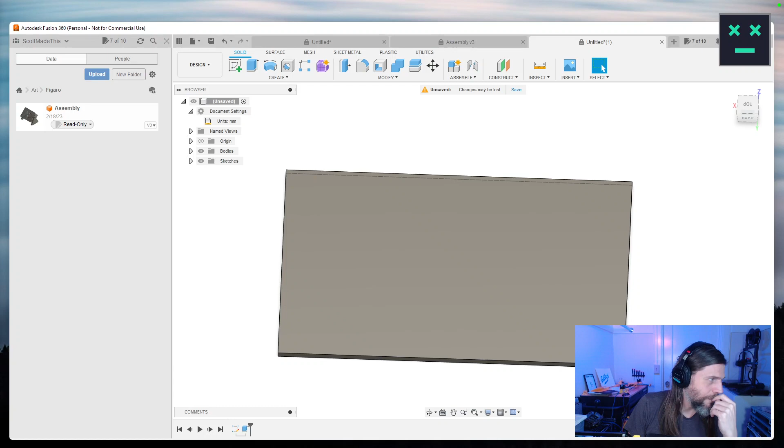Yeah, even Terrier says he used ChatGPT. I'm gonna be out of, like, the world is not gonna need me anymore because of ChatGPT, which is fine because I don't really like doing programming jobs.

Okay, so here's my thought of it. Given the sort of little layout we have, let's just take a look at what we have on the old desk here. We have this, we have the little speaker hat. It works okay, I'm done thinking about it, honestly, and we're just gonna do it. I kind of like the arrangement of this, sort of like we have it kind of arranged like this, and all of the electronics in a little stack, and then the little stack.

I haven't fully thought this through, I have to admit. The little stack kind of ends up on the thing - you know the thing - screws to the faceplate, and then that mounts to something else. So I'm interested in that approach. There's a couple things that make that approach annoying: these speakers are definitely designed to be screwed in. I had thought yesterday that I could make little slots for them - there's just a little bit, maybe like 2 millimeters or something of a little lip on the edge.

So I was thinking of maybe making it where those slide in and then butt up against the posts that the Raspberry Pi would hook to. That's my current thinking at least. I thought I'd rough that out.

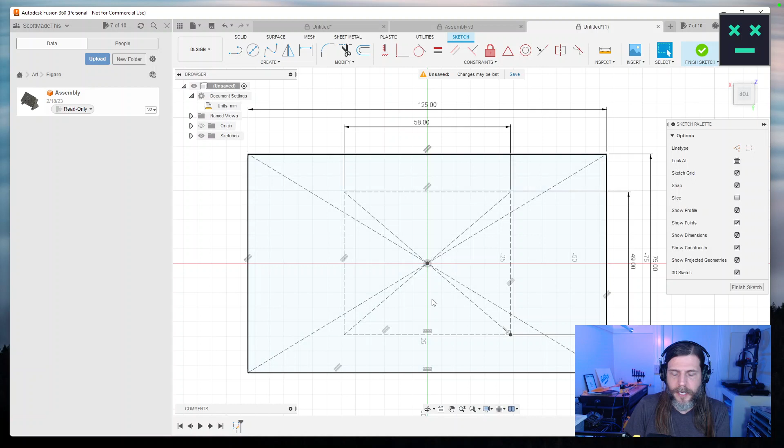So what I was thinking is we'd kind of lay out whatever the post size is here. We had a bunch of posts on the other thing, but knowing it's a 3mm screw and we probably want 2mm on each side at least, let's just call this 8mm for now. And then why did I put it on that one?

Let's put it - okay, let's do a better job first of all.

Terry, do you think I should become a full-time Sudoku streamer? Give up on everything else?

Let's do 8mm here, and then we can use a rectangular pattern. Yes, the thing is I'm not very good.

Do you think that's a problem? Do you think it's a problem that I'm not actually very good at Sudoku, or do you think that's not even relevant? Nobody cares about that. Or is it better that I'm not good? Because then people will want to help me on stream, they'll feel compelled. It's almost like a baby bird kind of thing where it's like, oh, this is clearly a helpless person.

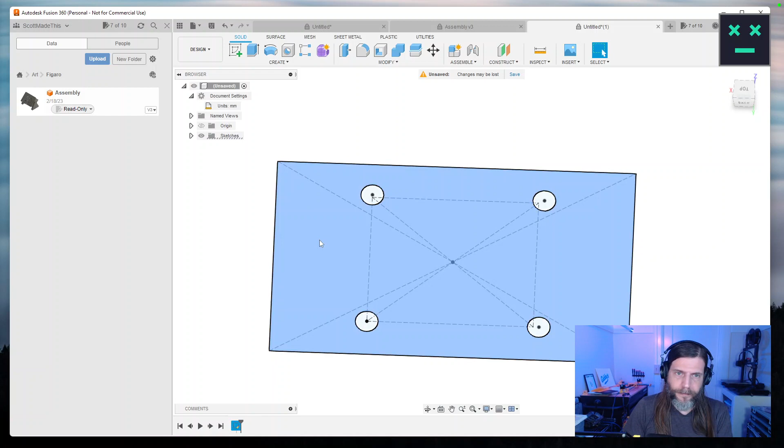So what I was thinking is we'd extrude this by a couple millimeters, say 3 - 2.5 even, perhaps. I've got to start thinking of those extrusions probably in terms of their implications for 3D printing.

I mean, obviously if it's really thick, it's slow, but it probably should be some multiple of my layer height or something. So here's my imagination, is this. These are going to have to be really tall though, because of the height of the speakers.

I mean, that is true. You never can trust chat. Terrier Darts, I don't even know if I can trust you after the hijinks you pulled on the racetrack yesterday.

Is it all just banter? Is that what I'm not understanding, the Britishness? Yeah, but I can't tell if you're just making a mistake or if you're deliberately misleading me.

So I think this is what this would look like, and then you could put holes on top of these.

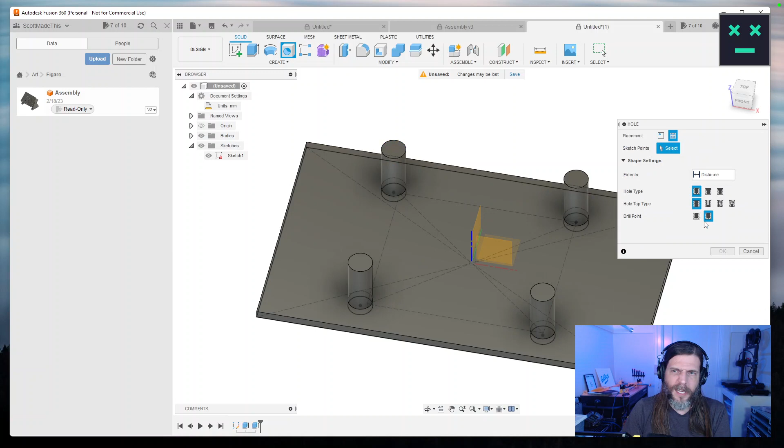Well, maybe this isn't really the way to do this. Because I don't know - a way you could do this is pick these holes, but do it relative to... I don't know actually if you can do this the way I want to do it, now that I think about it.

Like, you could - oh, good heavens. We could say that this is just simple. I forgot how you pick the tapped hole for ISO metric for a 3 mil.

The issue is I don't want to go all the way through there, and how do I do that?

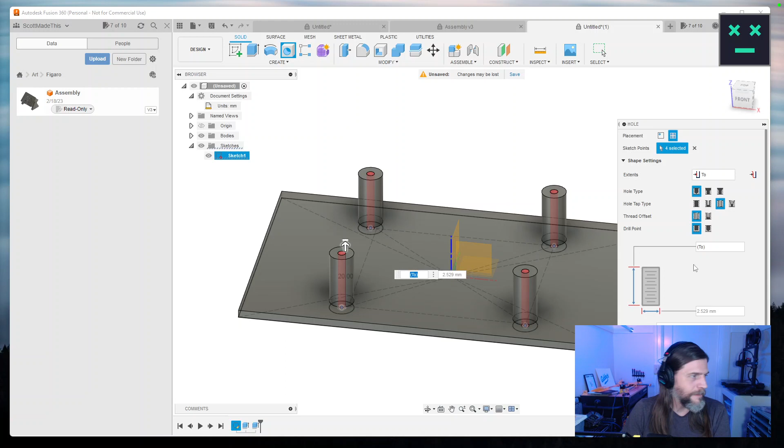That is funny when that happens, when you do a task failed successfully. Did Jirash just get mad and leave because I didn't do his work? Oh no, Jirash, buddy.

What's the right way to do this? You could rethink this situation and only go through those. So either you extrude it and put the hole from the top where you want it, or you do a sketch on the face, but it seems actually sort of weird that you couldn't do it directly.

Oh, is that what I want? But I actually want - I could offset this way, but I don't want to offset this way. I want to offset the other way. I don't know what this is. Oh, that's the thread offset - that's not what I want, that's not at all what I want. I do want a - I really want to invert this. Oh, is that? No.

Like, I wish I could do a 2 and then do an invert here. That feels like a thing you should be able to do. I mean, the very silly option would be this: do this extrude after. Which extrude is which?

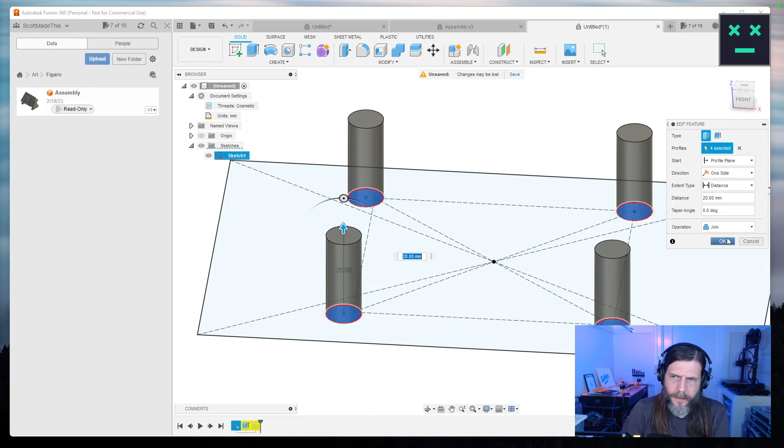I don't think this is the professional way to do this. I'm not a professional person. But you could do this. I'm gonna do this right now and then I'm gonna regret it later. Let's go 2.54 millimeters. Why not? Nah, 2.5. So that would plug those, make those holes extremely deep for no real reason.

So, you know, I was kind of imagining this, and then I was imagining maybe another sketch that described the speaker positions, where they would butt up against here but have like some kind of slot on the other side. I don't know if that's a good idea. I know it's going to be a little annoying for 3D printing for sure. We have to print it with supports and it'll be hard to get the gunk out, or you know how it goes.

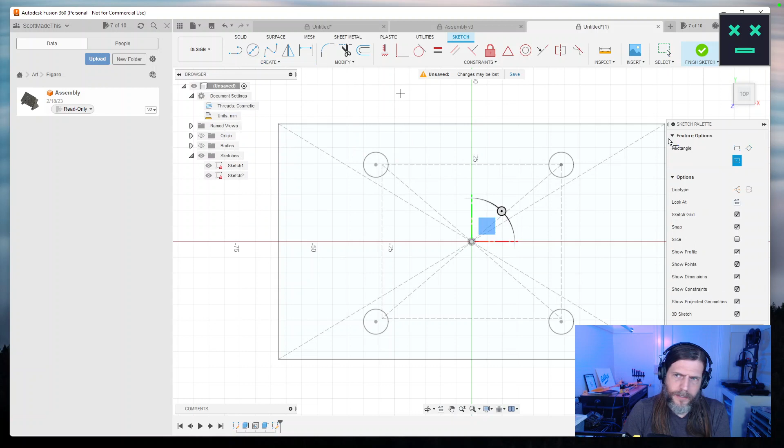But I think, trying to even think of exactly how I would go about this, the silly way would be just kind of to bool it. Because I essentially want to make just, okay, let's create a sketch here. And let's say that on this sketch, we at least want a center rectangle kind of reference for where the speakers go.

So the speakers are going to have, let's call it, 30.5 millimeters by 66. I want this to be pretty accurate, right? Oh, definitely, that's not how to measure it. It's a little hard because of where the cord is. How about this?

It's feeling like a 35 by 70 situation. How do you feel about that? 70's maybe too loose. Let's start with 35. Kind of blows my mind how big 0.1 millimeter is, just in terms of a fit.

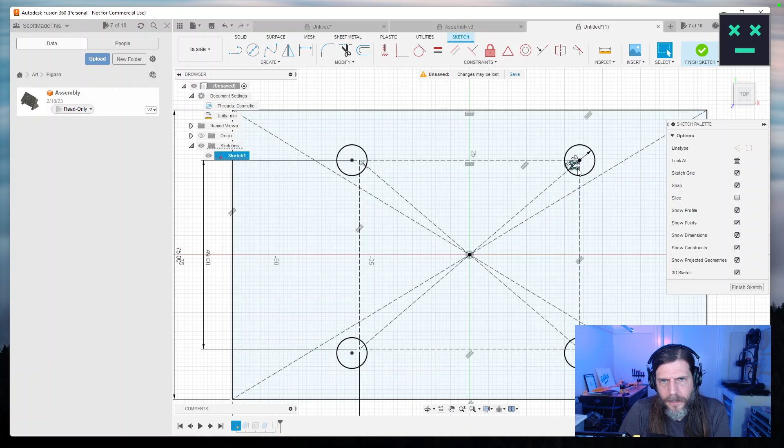Why do those holes look wrong now? How did I manage this? Hold on. What have I done? Sketch 1. How? That's incredible. How did I do this? It must have been on the bottom, first of all, which is not where I meant to be. Second of all, I overshot my target.

Not the right way to do it. How did I manage that? I guess it's because I didn't. It's a little hard to see like where it's centered. So okay, just snapped to the wrong place. How do you feel about that? So now that was too far.

So it's whatever this width is, which I don't know what it is. It's because we could project those points or something. But I think it was 48. Or oh sorry, what was it? Should make these parameters so it's easier, but that was 50 divided by 2 plus 4. But then plus the width, plus half the width of that. Oops.

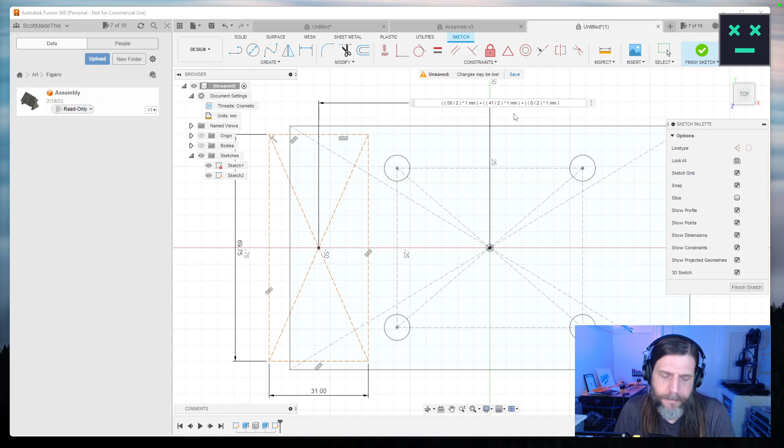So that would be exactly the distance, which is probably not really what we want, but because there's just no wiggle room there. So it does make the footprint of this thing obviously need to be bigger. Add 10mm in both directions, maybe. Maybe not, though.

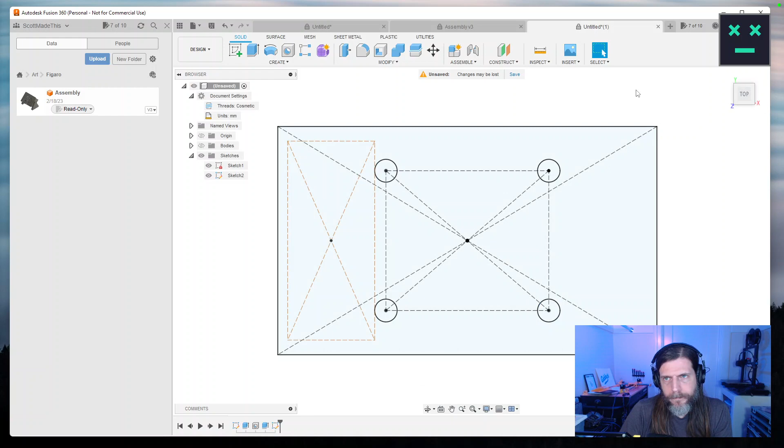So, you know, you could kind of imagine something like this. Or at least I can. I could kind of imagine something like this. The question then is, how do we make the cute little brackets, and how do we make the cute little speaker holes?

What's the height of these? The height of these is only 16. So if we do that and we add a little bit of clearance, 20 would be a lot of clearance, but maybe that's smart. Because there's got to be a little clearance on the bottom for, you know, solder or components poking through and stuff like that. So let's call these, well, that's 20 total. So that's not right.

Okay, I know I'm gonna regret not being more thoughtful about this, but as far as how we want to make a speaker grill, especially a weird speaker grill for these, what does that look like? I guess we know a width and a height for them. Unfortunately, they're off center, which is a bummer, but I think we just ignore that.

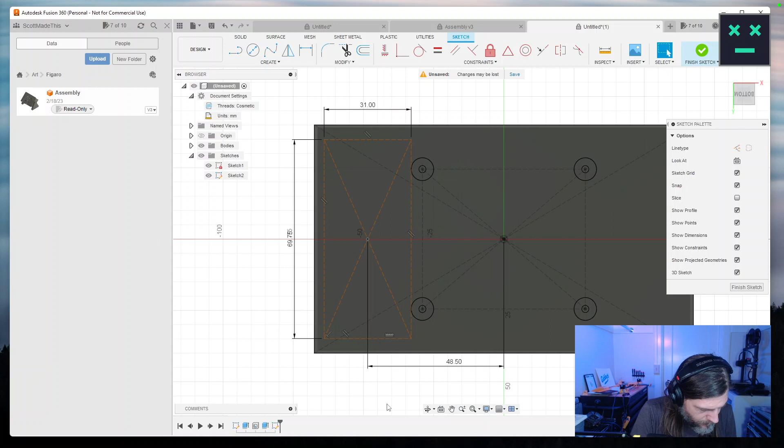So in other words, we just have a speaker grill where there's not really anything to be grilled. So 28 wide would probably be fine. And then if the whole height is 70-ish, and this height is 12-ish, minus 25, I don't know, call it 45 by 27, something like that. Center rectangle in here.

Is there already a rounded rectangle? I don't think so. So create a center rectangle in here and make this whatever I said, 27 and a half by 45 or something like that. This is just our outline template for where the speakers are.

And then we need a giant fillet on this, I think. Even more giant. I don't know exactly the radius, but it's big. I mean it's probably closer to 15. That's real big.

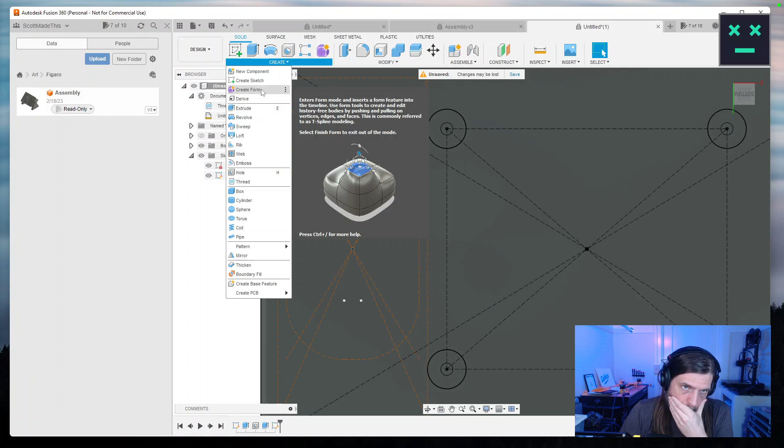Where's my problem? Get back in there. If we create, like, whatever our little speaker grill hole is, let's say it's 5 millimeters... 3 millimeters, what's a good speaker hole diameter? Let's start with 3, 2.5. Yeah, let's just start with 3.

I don't really understand why this isn't known. Don't we have a... we have a reference from there to there. This must not be referenced properly. What do you think that is? How could we... who's the culprit here? We would need to...

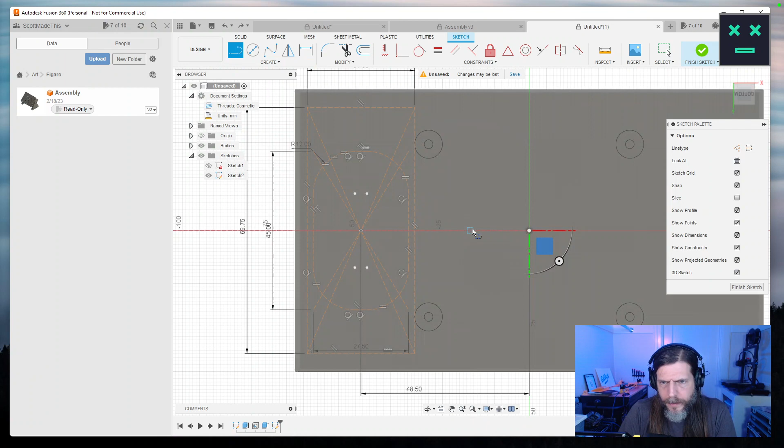I don't know the best way to do this. This is the only way I know how to do this. Make like a little axis line. There we go. Okay, so now let's make, oops, let's make a circle, a 3 mil circle.

So I think you can do a rectangular pattern, but like knock things out of the pattern, basically. Is that not true? Can't you tell it to go both ways and all that fun stuff? Like, yeah, so symmetric and symmetric. And then, yeah, you can turn on suppression.

Make that 4 and 4. But how did we lose our symmetry? I just say you're supposed to be symmetrical. Why is that not symmetric? Oh, I see, because it would have to be odd. Interesting. Okay, that's a lot of holes.

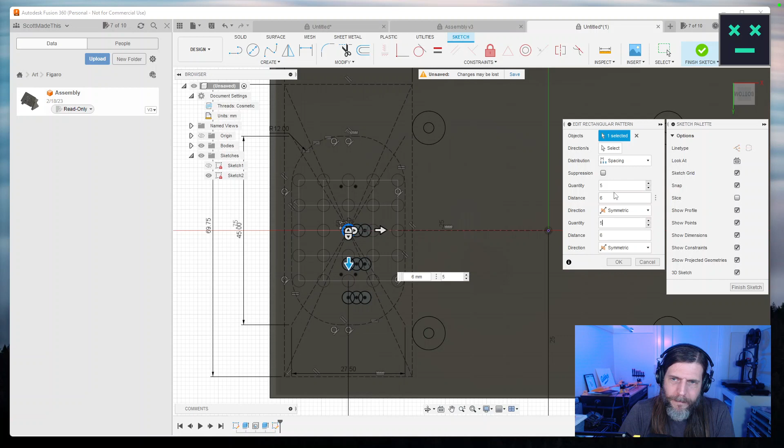Not more holes than I want. Maybe. So, but what I'm wondering, we can make vertically, we'll add more holes, even more holes, why not. But then the question is, with suppression, we want to suppress these holes. And end up with... cool, we did it, cool.

The problem is this is not associated with the... we have issues with this, with the body. I don't know yet. So, but what I want to do is make the holes symmetrical. But does that mean I need to, like, obviously I could...

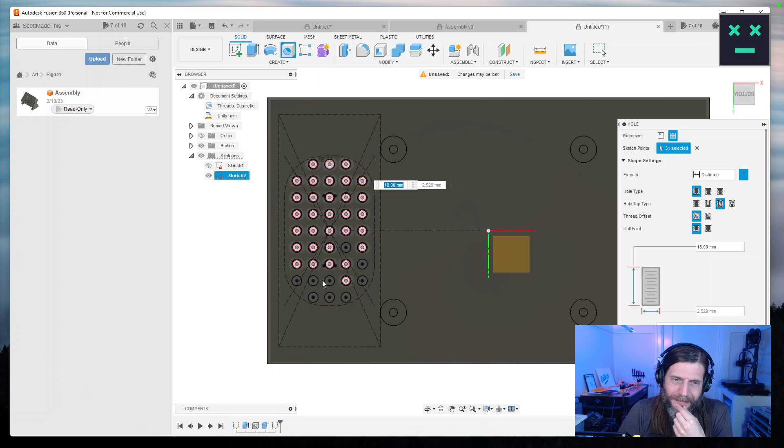Select a million dots. There's got to be a better way to do this. This seems very silly. Okay, I think I'm causing Fusion to suffer.

So, that gets us our holes. These are just simple holes. You know what? I didn't need to make the circles there, I just needed to make the points. Okay, hang on, didn't need to make the circles there, I only needed to make the points.

But... oh no, did I delete my objects, just the point. Okay, so I shouldn't need this, right?

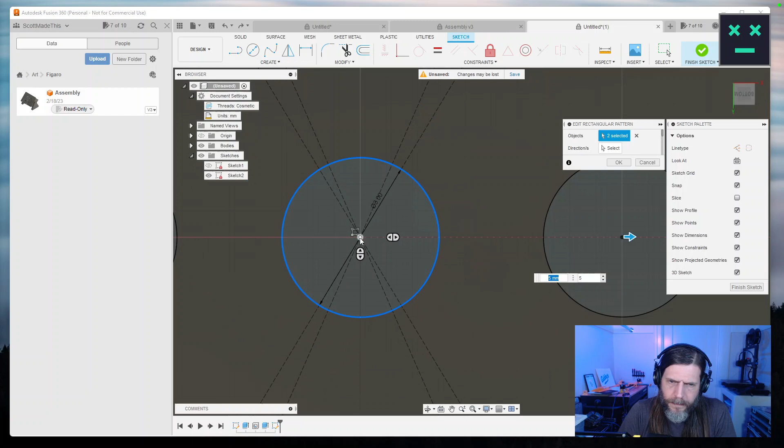Okay, so now can I mirror this? Do I need another little fake construction line? It seems like there should be a better way to do this.

If I just have this and my point, and I choose to mirror those on this line, no. I'm going to mirror. But I want to also mirror the pattern. You do that?

I'm learning all these things and I'm bad at them, but I'm trying to design an enclosure. And so this is the speaker grill, and I'm just trying to sort of work through what's the best way to do this. 360 mirror pattern sketch.

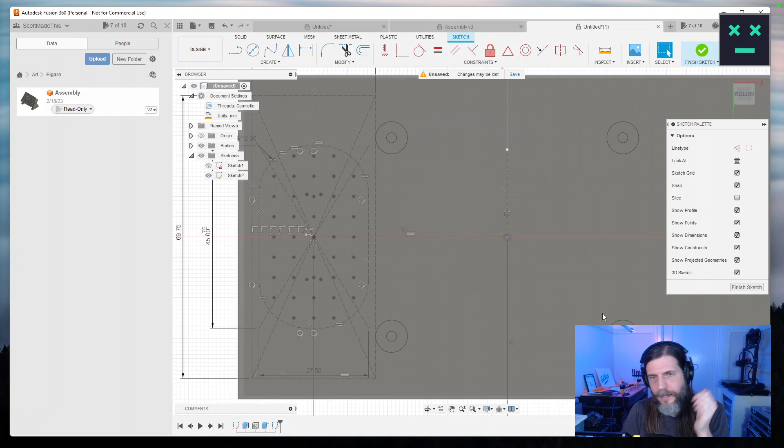Like, I just want to mirror a pattern. Can you do that? Or do I have to select all of those things? Which would be, I could. That would seem silly. Unless there's some trick for mirroring a whole sketch.

Like individual sketch elements, that's not very helpful. I need to mirror. Is that real-time mirroring? No, because I want to mirror all of this. But what I would like to do is explicitly mirror the whole rectangular pattern kind of as a unit.

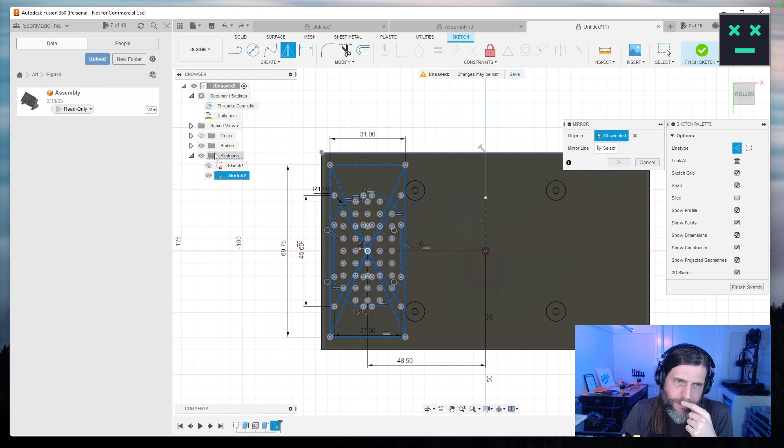I don't even see how to do that. Like, I could grab this whole thing, that I understand I could do that, but I don't want to do that. I don't think you can. I think I'd have to like grab all the dots. That seems silly. I'd essentially be, what is this?

How did I end up with that line projected? What are you? Get out of here. I mean, this looks awful. This looks like a disaster. I don't even know what some of these dots are. Oh, those are the radii. Huh.

Wouldn't you think there would be an easy way to do this? Mirror a group of holes.

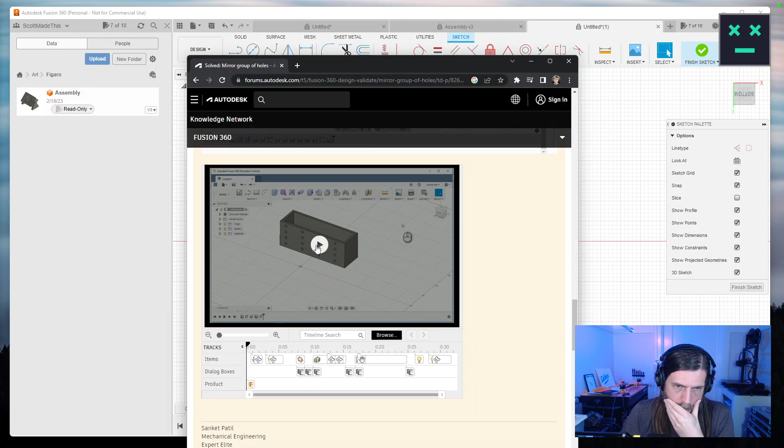Mirror features. Oh, okay. Is that the thing to do? Mirror features. Okay, so if we have this body, and now we draw it, we want to put a million holes in this. And we want to use this thing where it seems like there's got to be a better way.

I pick all these. Well, that's a poor choice. Guess we could go back and delete the ones that we don't actually want. Well, now I'm confused about which ones are the ones that I actually want.

Guess I also, if I'm going to mirror everything, I could have just mirrored this across. Okay, that looks like a grill, kind of, right? And then if I wanted to do what? Make a mid-plane here.

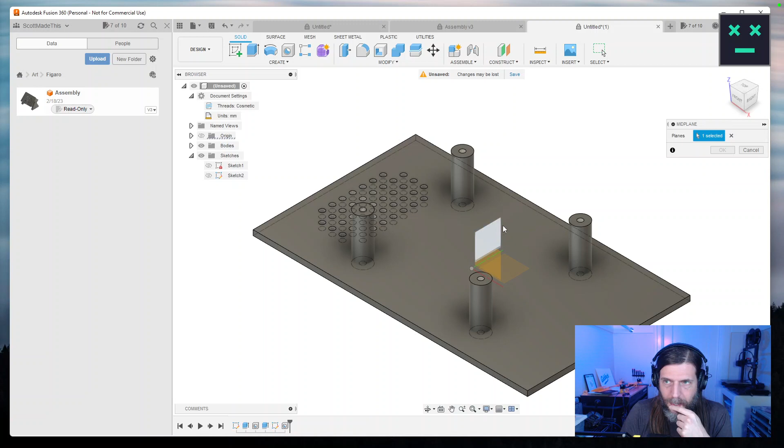I guess it's not a... What is it that I want? Just a plane? Maybe I didn't need to do that because I already have a plane there. So is it then...

Select all these? All my holes, and then mirror. This seems like a very silly way to do this. And then, oopsie.

No. Features. Oh, interesting. Well, this I think is actually not the right idea. Let's delete. Let's delete this. So maybe I did need that mirror plane.

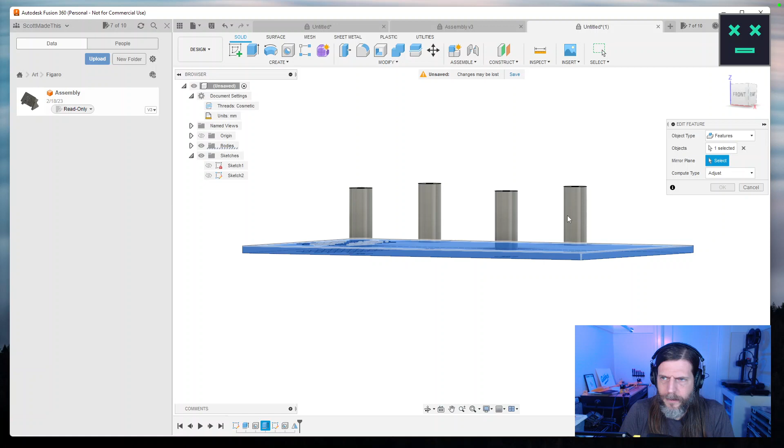Features from front. I think I mirrored it front to back or something weird. I want the features on this object. Give me features from this object. The mirror plane being this mirror plane.

And now I've plugged my own holes. I feel like that didn't go as expected. What did my buddy do here? The object, that was the mirror plane. How did you do that? How did they do that? What am I missing here?

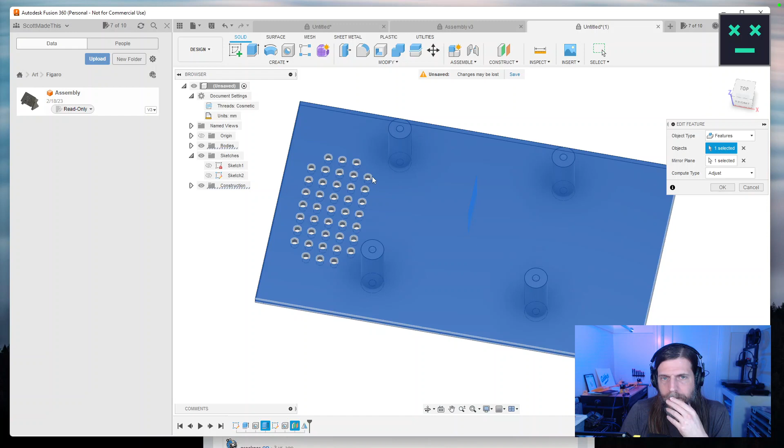I guess the other thing is like mirror. It's kind of a question of like, what am I mirroring?

Oh my gosh, look, we did it. Okay. So those holes are threaded, which is silly. These should just be simple holes. And I think we said we wanted 3mm holes.

Uh-oh. So let me pick the features again. Let me have them. Okay.

So we made this, it's very exciting. So the main thing, I will 3D print this one. I don't know if in the long run I want it 3D printed, it's just what I have here. Like I would, if I had a laser cutter, I'd use a laser cutter. If I had some kind of router here, I'd use metal.

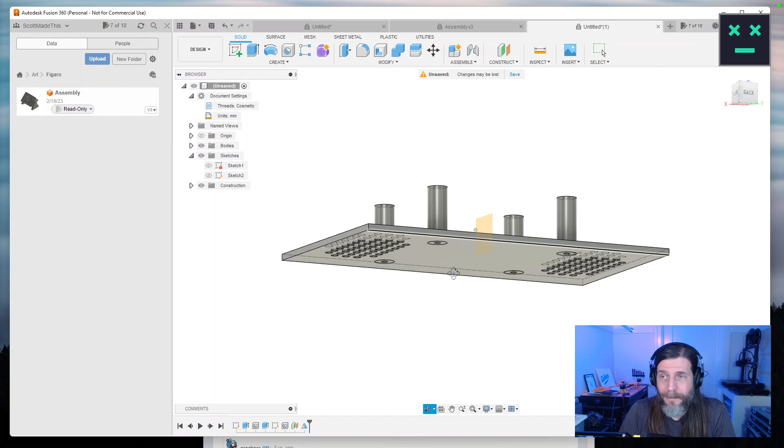One of these days, Terry, I need a shop. It's my only dream in life. It's my own shop. I have access to a shop, but it's not the same.

Okay, we did thread those. And we know we want the goofball light thing in the middle. I haven't fully conceptualized how that's going to work, but I feel like we're getting close to being able to just at least test this. The thing is, either we have dumb screw holes, if this is the facade, if this is the face, this is not an add or join.

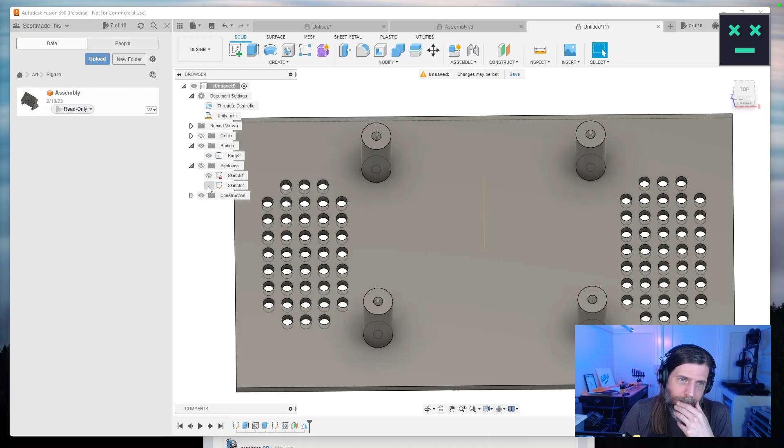I don't want to put screw holes in the front, I think. So I want to try this thing where I use these little brackets. It's definitely not something I really know how to do, but I have some confidence that I can do it.

I don't know if that's going to work very well, but it's pretty thick. It's probably thicker than it needs to be.

Let's see, I'm going to guess a couple hours, but we could do a save as mesh, and let's just send it to Cura Slicer. I haven't eaten any food today, should probably also do that. Just want to stream for a little while, maybe take a break, maybe go outside, touch grass.

But I thought maybe I should try to do something else. Okay, so this looks like 2 hours 41 minutes. This definitely doesn't need to be—this face does not need to be this thick, for sure.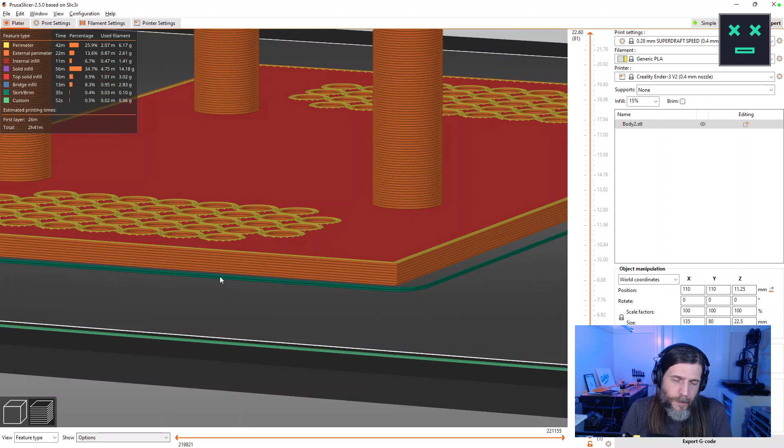What did we say that was, 2.5 mil? I mean, it's fine, because I'll just go start it and then go out and live my life. But is it really only 2.5 millimeters? Why does it look so much bigger? Two millimeters is probably fine.

The issue really is that I didn't design this very well. It's like, where do we extrude those? Okay, so right now I believe if I really did this in a very silly way, because I didn't know how to make the holes from the top, is the real answer. But I must know how to do that.

In fact, okay, let's reconsider a few things, like these holes. Can I not multi-select faces like this? I guess not. And if I were to do this, I would need those. So I'd have to project up, or—it's surprising to me. It feels like there should be a way to do this.

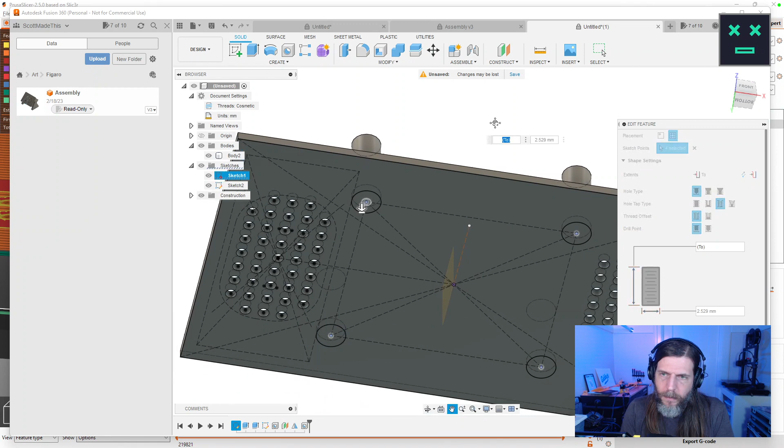As far as those center points, to cut down from the top is basically what I want to do. I definitely want to use these holes, but the face from which I want to cut is a different face. And if I could do an offset, that would be fine.

Let's say the objects to cut. You know, it just seems like I'm not—I guess I'm just sort of surprised that there's not a way to do the thing that I want to do. Maybe there is. I essentially want an offset, or the ability to flip from this face. But I'm not seeing it.

I don't know how I did that on the... I guess on those other things I just wanted pull-through holes. I mean, the other option is to extrude these totally independently, say that they are separate, and then join them after the fact.

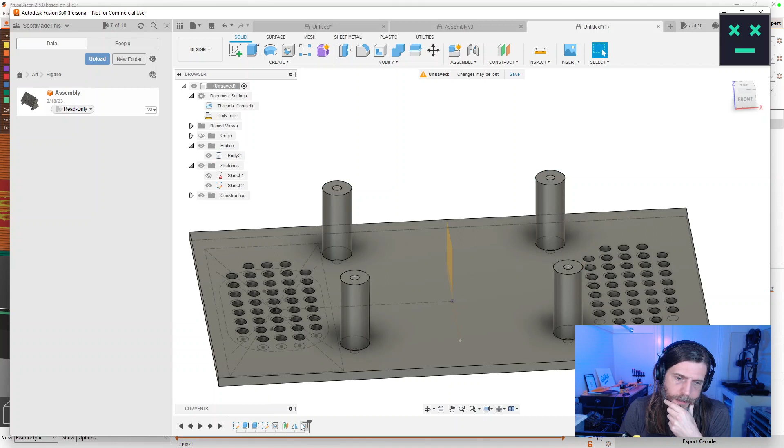I don't know why I can't move this. I don't know a better way to create an extrusion here now using these, but starting on this face, and making them a new body, so they don't penetrate. And then that new body we're saying is 20 mil.

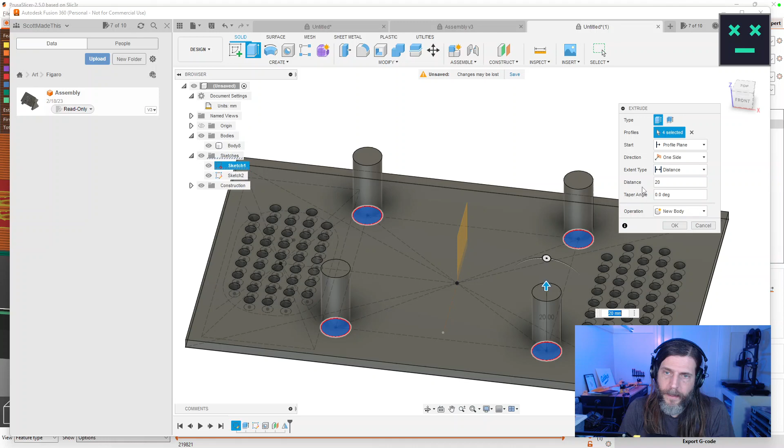I'm not crazy about this because it makes these posts all separate. But then when I make the holes, it's easy. So I'm just going to go with it. And then after the fact, after our last step, we'll need to combine these. I'm just so positive there's a better way to do this.

But anyway, so that gets us this. And then, not the last thing, but a thing that we still want is the little bracket piece. And the geometry of this is going to be a little tricky. Got to think about this a little bit.

So the geometry of this thing—I can think of a few ways to make it. I don't know that I like any of them, but that is something like 1.5 millimeters, which is not very much. But basically it would be—how would you do this?

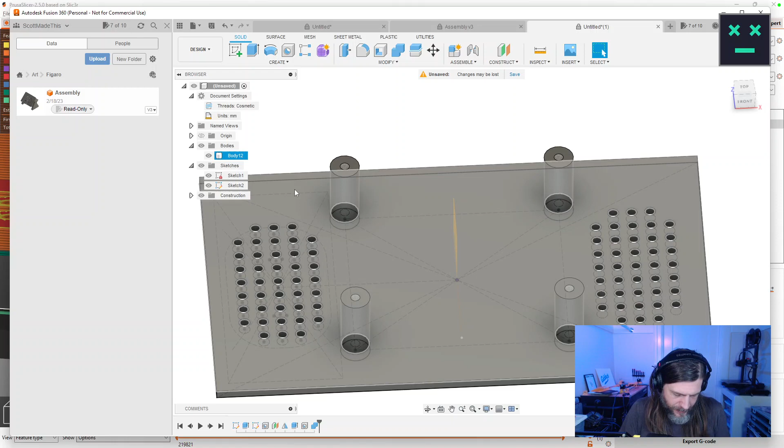I think I have an idea. I don't know if it's a good idea, but I think I have an idea. So I think what we can do is make a new sketch. And what we need is—I don't know how to do this really. Oh, oops. Better save this.

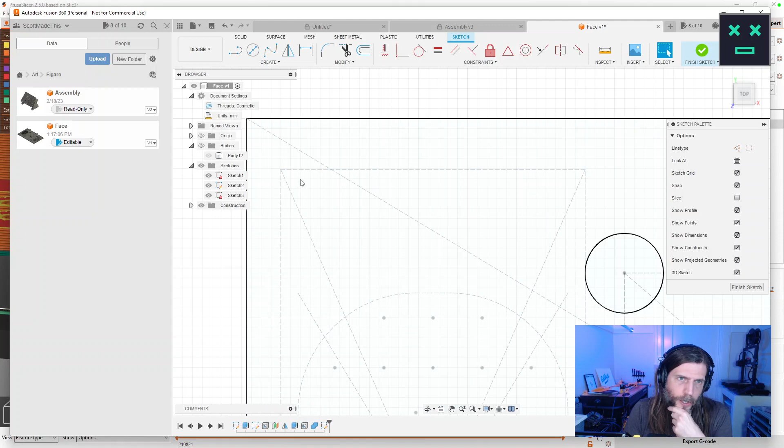A new sketch, and we want a 3mm box here, basically, that is bisected—or maybe the easier way is just... can I not get on here? Sometimes Fusion just decides not to snap to things, which I find infuriating. But this is going to be 1 point. Shoot, oh. That's 1.5 and that's 30.

And then I think we essentially want the exact same thing. Don't know why this seems to think it's not. What did we say the width of these were? Okay, and then we want really the same thing here.

Oops. And so just to be clear, what I'm trying to do is say, what did we say the thickness of that was? Also an important question. It's much thicker.

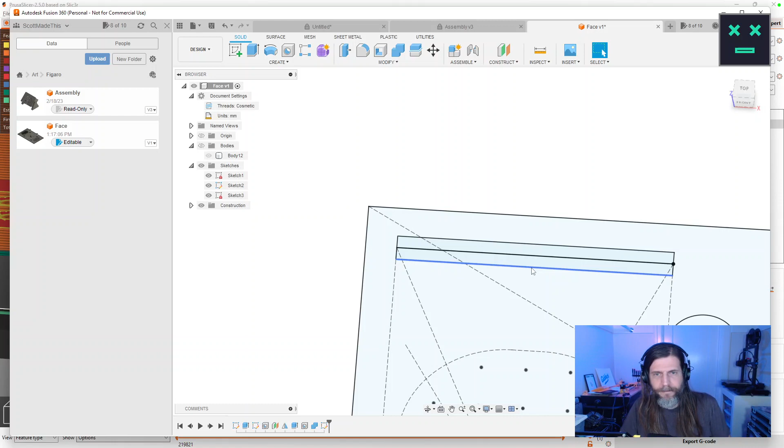Okay, so what I think we need to do here is, this is confusing, but let's get this body back. I think we want, this is really weird, how do I do this? I think we want to extrude an extrusion of this and this from here.

That is 2.75 times 2. And then we want an extrusion of just this from here.

That was wrong. I'm going to start here and do a cut, but why is that wrong? We said no offset. We have the profile. Start should be this face.

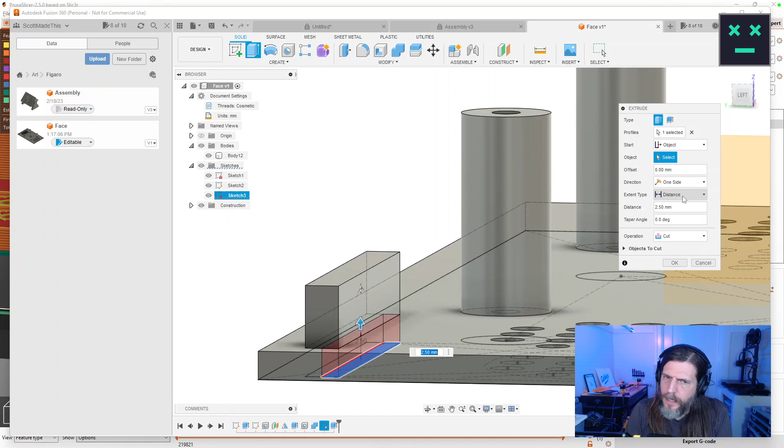Maybe I did that incorrectly. So I want an extrusion that starts here, but I want to start here. Maybe that did work. Well, that seems like it made a weird hole in that. Is that not?

Okay, sorry, and the height of this is 2.75. Did that actually work? Okay, so we made a cute little bracket. And now the thing is...

You think I can mirror a feature on this? Like mirror that feature? You think it has to be a separate thing?

Like if I want to mirror features, can I have this whole thing on a mirror plane that is this mirror plane? Did it work or no?

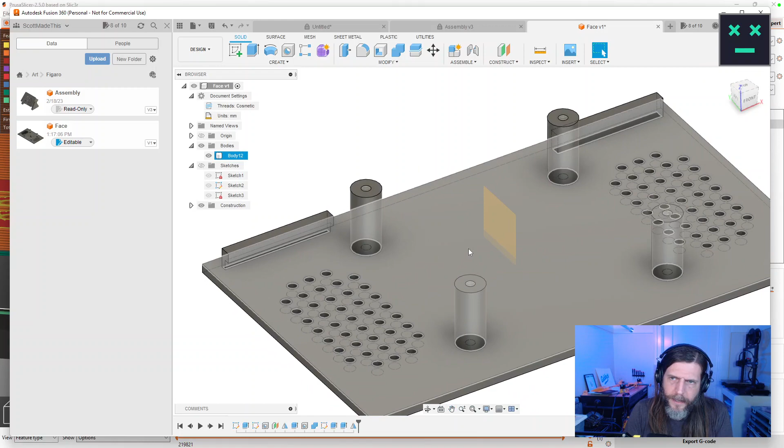Okay, almost. It did one feature but not the other. So can I get the other feature even though it... That's funny. You kind of would have expected that to work. But I don't think it worked.

Okay, well, the other option is to not make a join here. Make that a new body. And make this mirror bodies. And mirror this whole body.

And then do another mirror on this mirror plane and select this body. I said bodies, this body and this body. Why can't I select that body?

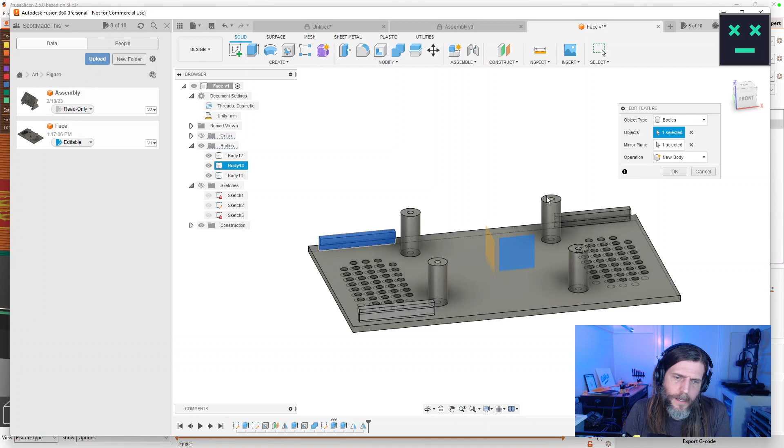Why did this second mirror not work? Why can this mirror not have this body? Doesn't that seem dumb? Unless this is a new body.

So these are, this is a body. Wait, what have I done? And I want this and this mirrored on a mirror plane known as this plane. Okay, all right, that seems to work.

You know, that really doesn't need to be that wide, but okay. And then now we should make our combine way down here probably. Or do I just have to do another combine? Does it matter?

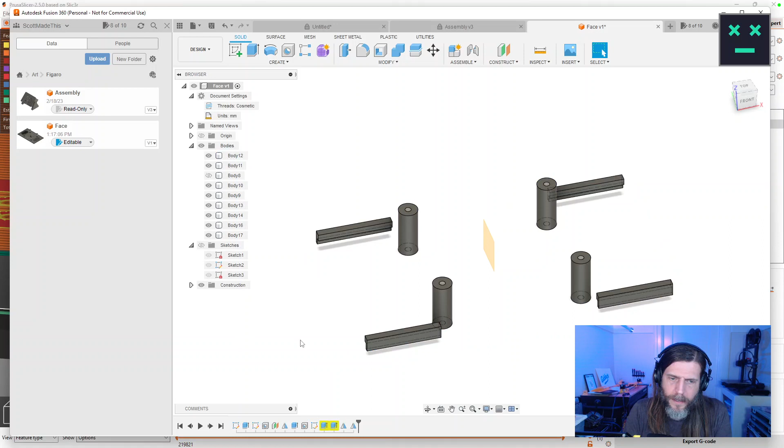Uh-oh. Wrong, start object. Oh, I've definitely broken these.

Start here. What have I done wrong? I'm going to start profile plane, start object, start it from there.

2 times 2. And then this one. Why can't I pick?

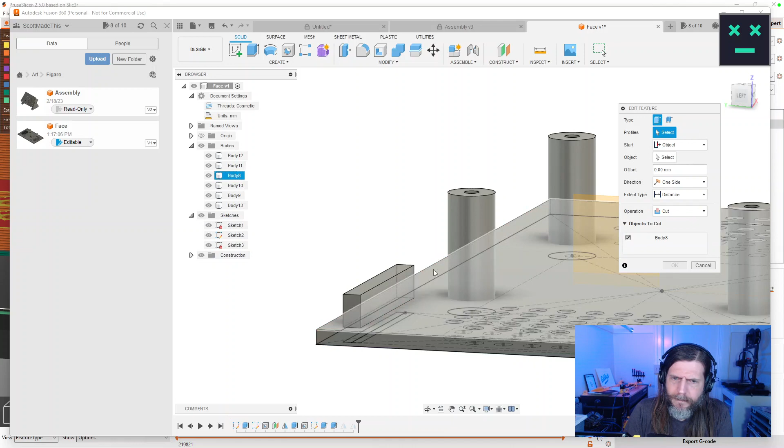Want this. What have I done? Maybe I did. Maybe we're good. 2.75. No, we're not good. Shoot.

Don't want to cut body 8. Somehow I've broken the start object. So let me try that again.

That means right here we want an extrude from here, starting here, going up 2.75, cutting just that object. Now we want to do all this stuff.

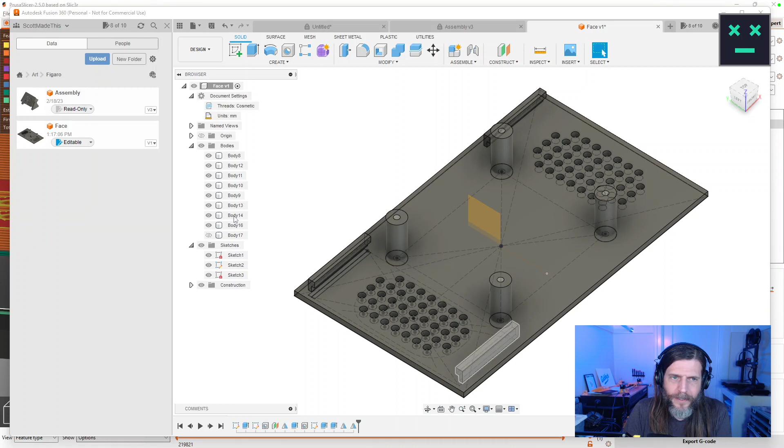Okay, now we've got all these dumb bodies, and now we want to just combine everything with, I don't understand why I have this many things, but I guess I do. Okay, certainly better ways to do this, but I'm going to go with that.

Okay, what do you think of that? That looks like... that sort of looks like something, right? Maybe we fillet this.

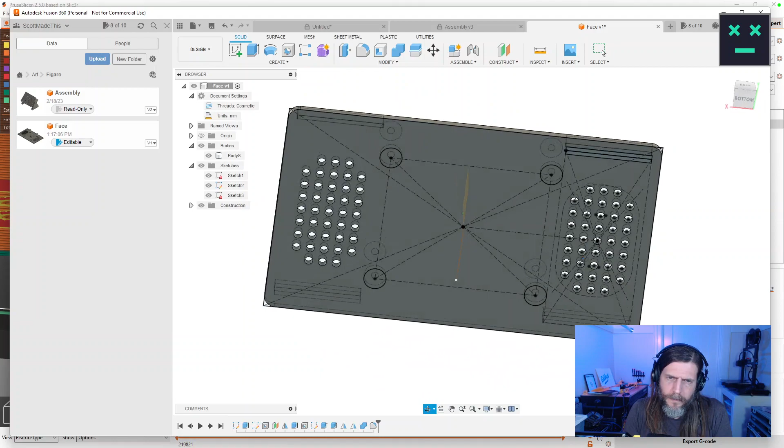Try to decide if we start working on the light or not. With the idea that this little fruit loop goes in the middle, we could knock out the hole, but do we try to make some clever bracketing system or something? I really don't know. Or do we just print a little plug that sits in the middle and make it easy on ourselves?

I don't know, but I know we should just knock this hole out just so it's a faster print, probably. How big is this? Something like 46.

46 is going to be very tight, but maybe it doesn't really matter. I mean, it's not like this is the final piece, you know? So let's just put a big 46 millimeter hole in the middle.

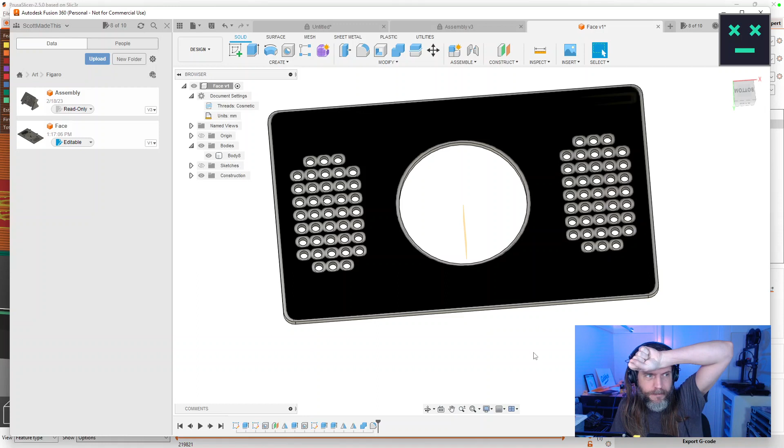Oh wait, I had a different idea. I forgot, an idea came to me in the night. I had a night vision. How could I forget my night vision? Terrier, I had a night vision. How do we address the night vision that I had? Okay, yeah, you can't scoff at night visions, sometimes they're critical. I had a vision.

I don't know where I got these dimensions, by the way. How thick is this? Less than a mil. Let me get away with 0.5 millimeter on the diffusion layer. That seems like 0.9, that seems even thinner.

I printed some more, didn't I? What might I have done with them? I mean, really, they could be as thin as you want, right? If it was like in vase mode.

Excuse me. For the purposes of today's exercises, we're going to call that 1 millimeter. And then it would be so cool if there were actual dimensions for this little outer fruit ring. Call it like 46.5 with an interior diameter of... Actually, that seems like a thing that we can probably find specs for, right?

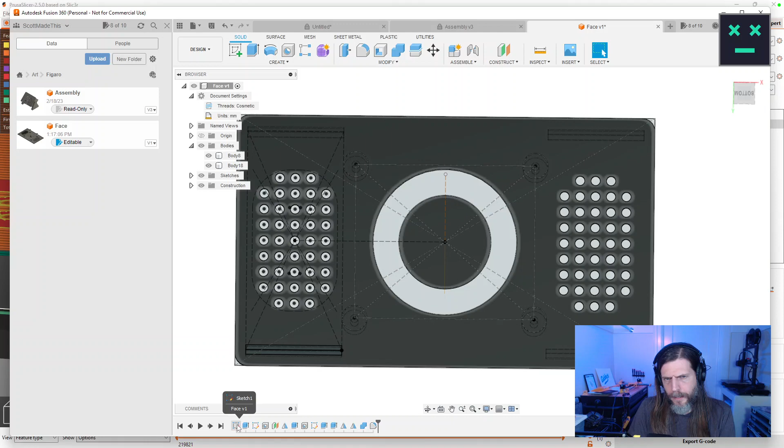And we have a few options, a handful of options here. I kind of like the idea of it being split into... So this is 16 LEDs though. So as far as like where it would be clever to... That does not divide nicely by 3, I will tell you that. These will have to be pretty small.

This might be a poor choice, but I think we're gonna do it. So let's do that, and then let's do something akin to... something like this.

Am I even in the right sketch? I want to do something. Why did that seem very good? Let's try that again. Say we want to center a rectangle. Let's draw it up here. Just make it 16 by 4.

And then let's set a distance between here and here. That was too many. Why wouldn't that be enough to lock that? Do we need like a collinear between?

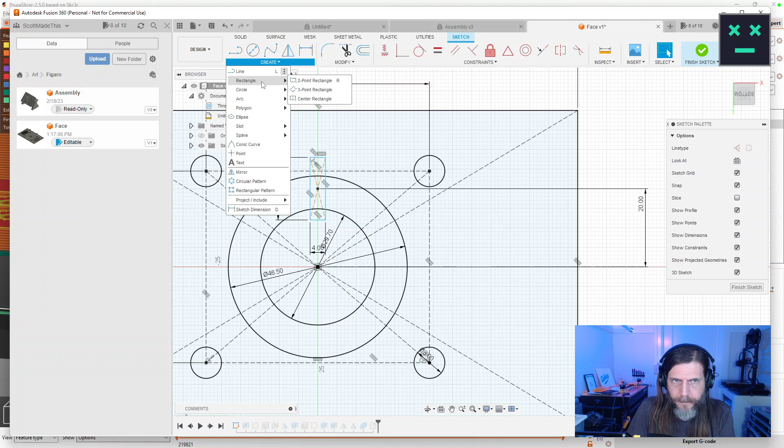Okay, maybe a better thing to do is not that way, and do like a line like that, and then create a rectangle on the center point of this line. Still doesn't seem quite right. Like why doesn't that?

I guess I don't quite understand why that's not locked in. That's not enough to do it. Wish there was, maybe there is a way. I just want to know why aren't you locked?

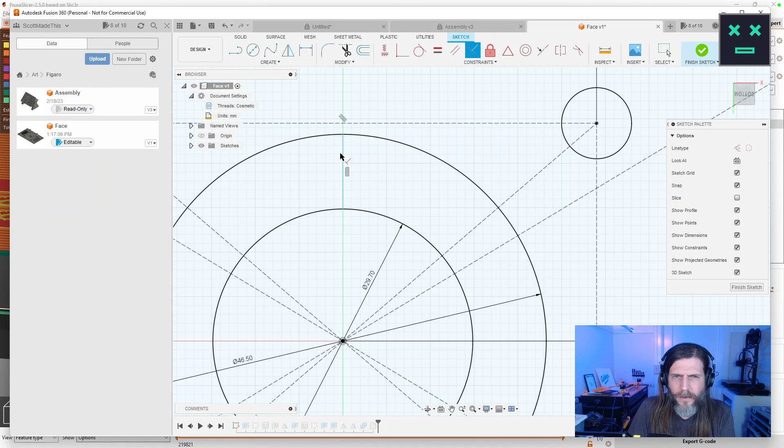The midpoint of there and there, like, can you do a perpendicular with a... probably not really. This is probably really obvious and I just don't know. I mean, you could just cheat, right? And just fix it.

Does that mean this is, yeah, well, I don't know. Okay, so then we would do a circular pattern, I guess, with that, and this is the center point. We need 4 of them.

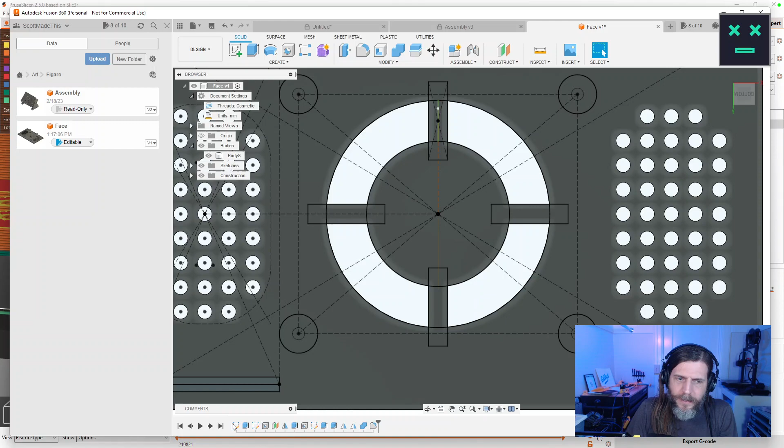And now when we do this extrude, we also want these. Certainly not the best way to do this. That was only supposed to be a reference line anyway, by the way. Construction line, I think is the term. But now we'll never be able to change that. Anyway, okay, that's what I was aiming for. I don't know if I like it, but that's what I thought I wanted.

Guess we could fillet those very slightly.

Life is yours is giving me career advice on Discord. Okay.

I mean, this is bad, really. It's pretty annoying. The thing to do would be to offset the speakers. There's just going to be black plastic right behind some of these because they're definitely fake holes. But maybe this is enough, maybe this is enough.

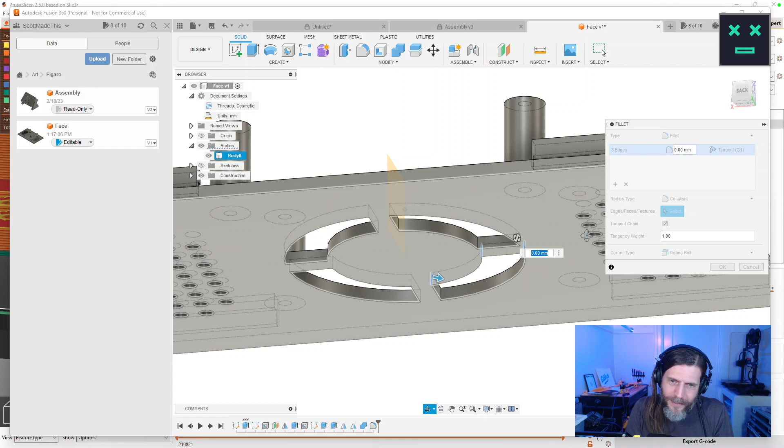Positive there was a better way to do the thing that I just did. That's an interesting thing about stuff like this - certain kinds of assets, you don't have to worry about things like that because you can fix it later. But I don't have that confidence here. I don't know that I can fix anything later. It feels very possible that I might just have to redo this thing.

Obviously the thing to really do here would have been to do a separate sketch for this hole, and then use that to cut out the top. Even as I say that, I'm tempted to go back and do that instead of what I did. But what are you gonna do, other than go back and do it right.

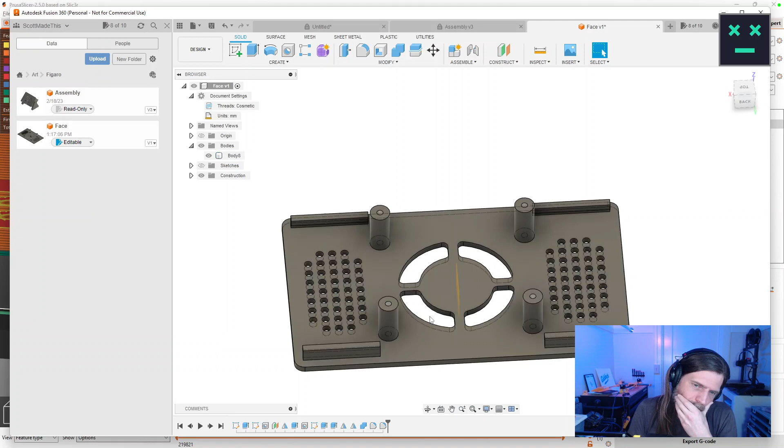Really, you probably want to make a little lip here, huh? I just said that we weren't trying to really do this, and now I'm trying to really do this, but as long as we're just deciding to not do this right...

You could make another circle here that was something like 50 millimeter, and then take that... that's hard to do actually, as far as getting this whole thing, now that I have so much dumb geometry in here.

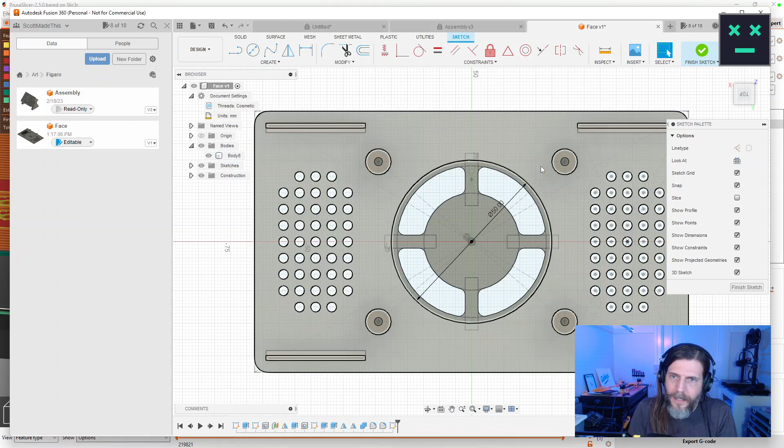Oh my gosh, this is a bad way to do this. Okay, never mind, we're gonna do it a different way, which would be smarter - now that we have this, we will do a new sketch on top. We'll draw our 50 mil circle, and we want to extrude it with a cut going downwards, maybe make this half the height.

Just so you could drop in the little diffuser in there.

Not convinced those posts needed to be quite that big, but half of this design is based on the size of those posts, so I'm a little hesitant to reduce them now.

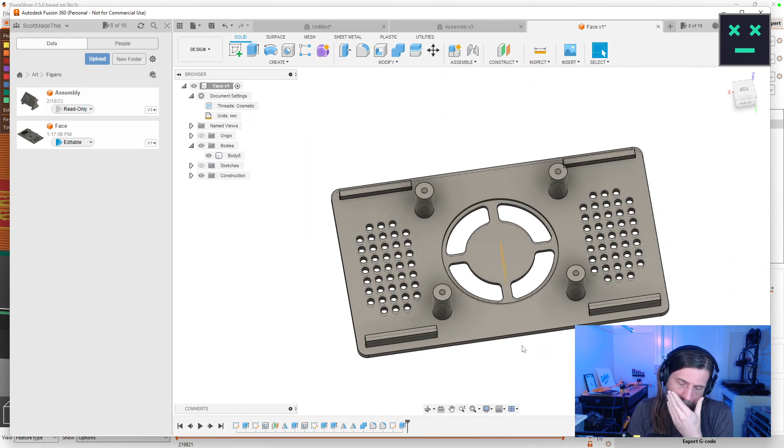Because of the way currently this is aligned - it doesn't have to be true, but so much stuff is. I know how to design this a little more parametrically, and it would be easy to change that stuff, and you could go back and do it, but I don't know if it's worth it. There's very little chance, basically no chance, that I print this and I'm like yeah, this is the one, I nailed it in one.

Just don't think that is going to happen. Kind of the way this works.

I have to think about that a little bit. Okay, but I think I'm ready to print a test, right? This seems, it looks like a thing.

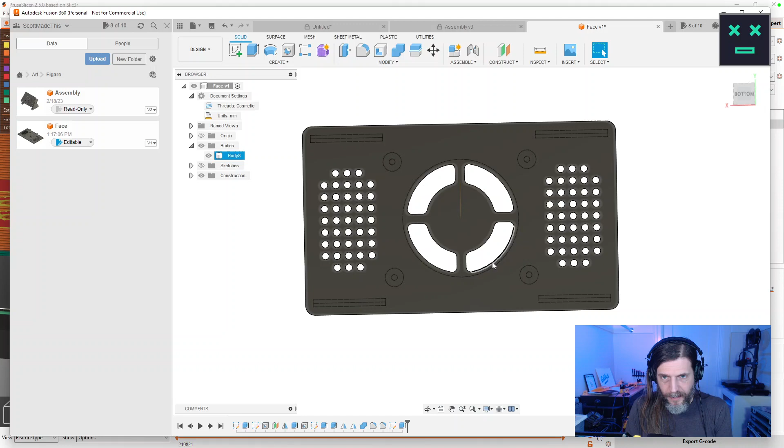This is the fun part where I start to print it and it prints for 2 hours, and I realize I got one measurement very slightly wrong, just some tiny little thing. So what filament should I use?

I think I'm going to use the terrible black filament that I don't like, to get rid of it, because again, there's just kind of no chance that this is going to be a real piece.

I'm realizing we didn't really leave any room to have any kind of enclosure attachment - you'd need to go a little wider at least to be able to put some screws on the side or whatever.

Maybe we should do that.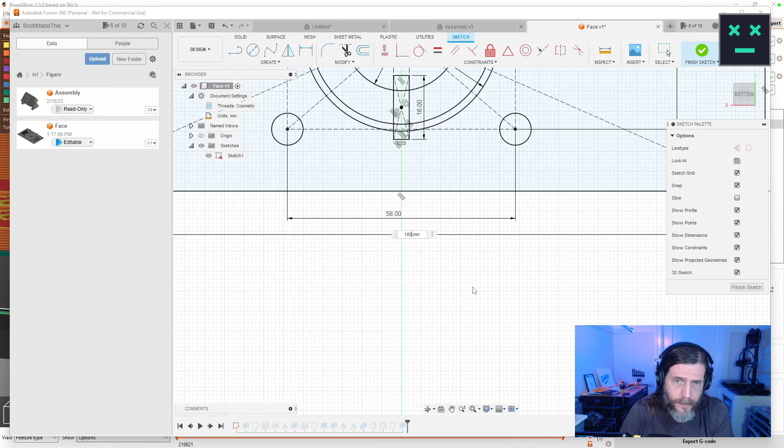That was not the thing to do. It wasn't to add 30. So what was this? 135. So this should be more like 160, I guess, if it's going to be half-inchish on both sides.

Is that a through hole? Let's add a point here. Something like that. And then let's pattern it.

Is it better to pattern this or mirror it later? I just don't know. I think it's better to do this now.

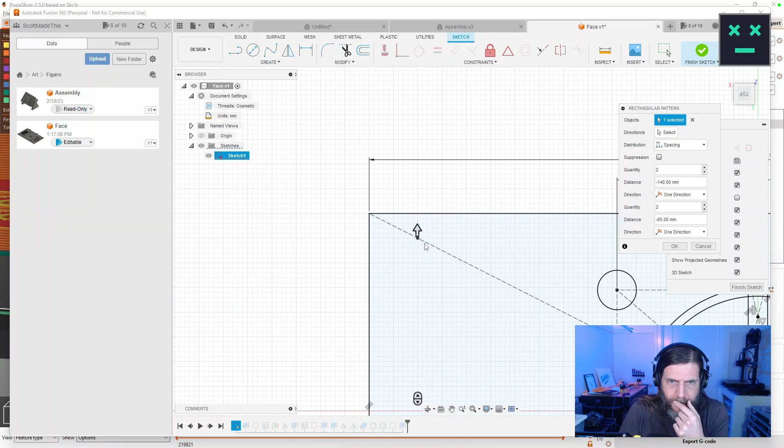This gets a little tricky as far as the relative placement of these edges. But am I just kind of getting it? I mean, I guess I know it's like that length. So if that's a distance, then that makes sense. And if that's 80, then that doesn't make sense, but that does.

And then if we did another hole pattern, that was not the place to put those, by the way. We wanted these to be simple clearance holes for an M3 screw. Those should have been more like 5 mil from the edge, honestly.

So let's do that. But how do I keep ending up totally upside down and backwards in these sketches? Shoot. Anyway, 5 and 5. And then add 10 to this and add 10 to this. Not very parametric, huh?

But does it look okay? I think so.

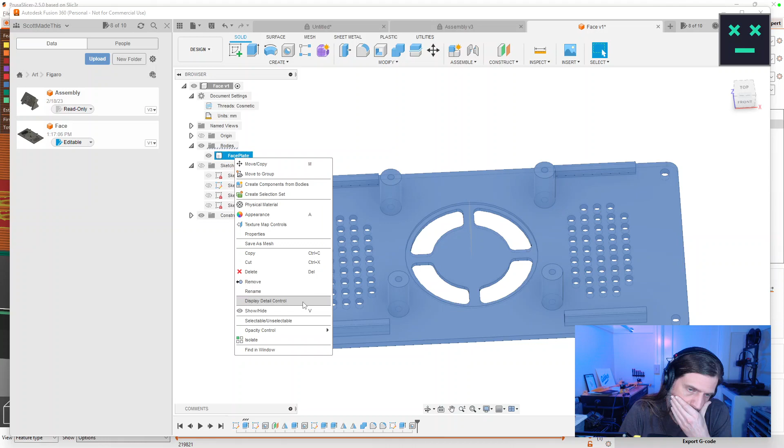So, I don't know. What's the damage in terms of 3D printing time? 7 billion hours. Do the holes make it faster or slower?

I mean, it looks kind of cool. It almost looks cool enough to want to print it with real filament and not trash filament.

Like, what if it works? What if it works on the first try? Very unlikely. I think that's also super draft. Normal speed, this is gonna be so slow. 4-hour print. I think we do need supports though, right?

Those little overhangs seem... oops. Get little supporty boys in here for those.

Bump it up, nice solid 4-hour print. A lot of infill, which is sort of surprising.

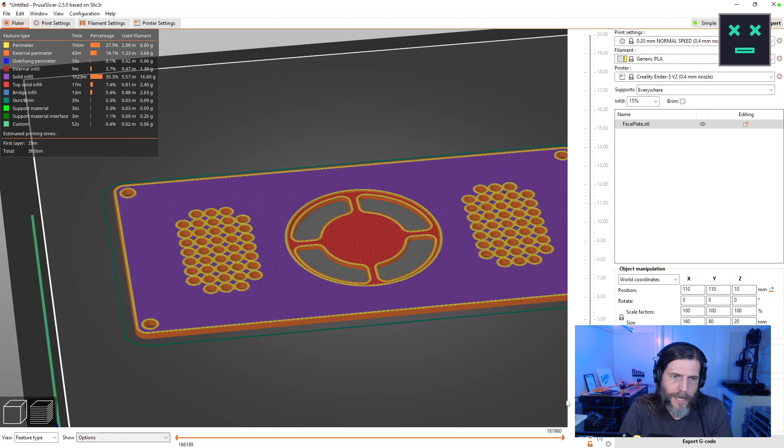I only have, no, I'm sorry. Internal infill, we've barely done anything, so that's actually not taking much time. It's this solid infill, I guess, because of how many layers we're saying we need for the top and the bottom. And then internal infill, okay.

Why do we have all this solid infill? That's just the bottom, I guess, right?

So what if we didn't do that? Took up a chunk of time. Perimeter is now the slowest.

That's hard with all our Fruit Loops. I'm sure a fair amount of that is... it's really what tells you where the time is, like as far as if I want to know the time right here.

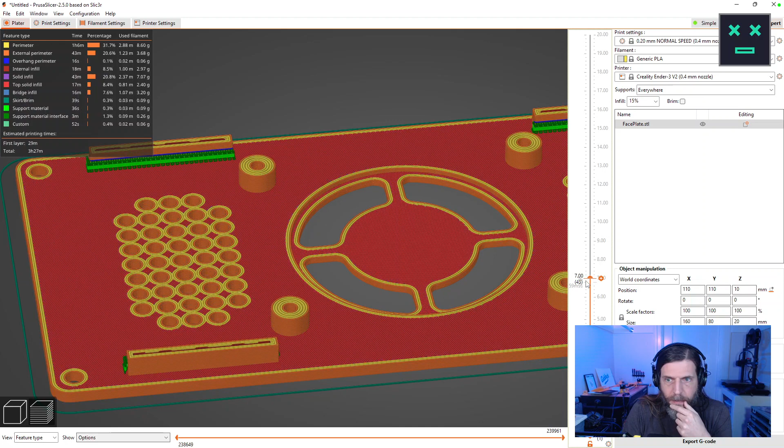Oh, I didn't mean to do that. Cancel. Abort. I guess it kind of would let me see where the... can I change where the color would be?

Like just to print that. Where is the color change? I guess if we... is it there? I'm sure there's a more correct way to do this, but this is how I see to do it.

So okay, so it's 47 minutes. So it's 2:41, and so that bottom thing is a 2-hour 41-minute print.

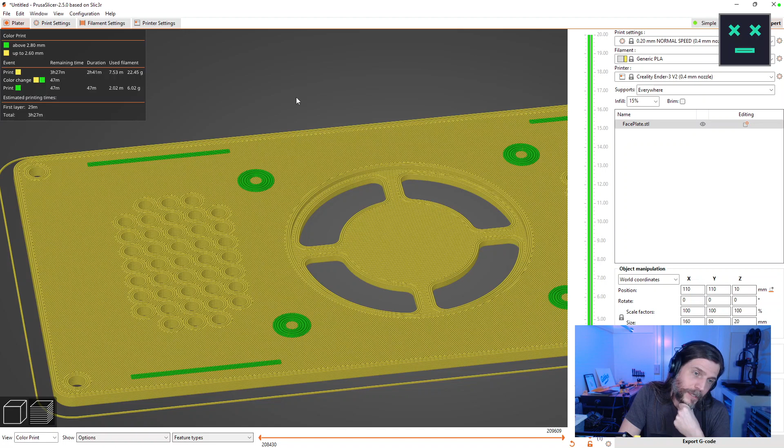How could we make that take less time without just putting more giant holes in it? Could be thinner. What do we make that, 2.5?

Well, I mean, I'm learning, you know. So I'm definitely learning how to do all this stuff. I'm learning how to do the CAD parts of it. I'm learning the CAD software, right? I'm still learning Fusion. I'm learning the design process, like the design thinking for this kind of industrial design. And I'm learning the sort of ins and outs of the materials and the tools. So it's a lot of things I'm just pretty new to, I guess I would say.

And that's why it's so slow. And I got fun news for you: this is just for the first test print, you know, like it could be dozens of hours of printing and testing and revising, but it's how I can learn. It's how I can learn anything, I guess, is just by doing it.

I do feel like we kind of made everything too thick. And I'm having trouble remembering what are my normal thicknesses, left to my own devices. Like 2.5 millimeters. Going thinner than that, you start to worry that it gets flimsy.

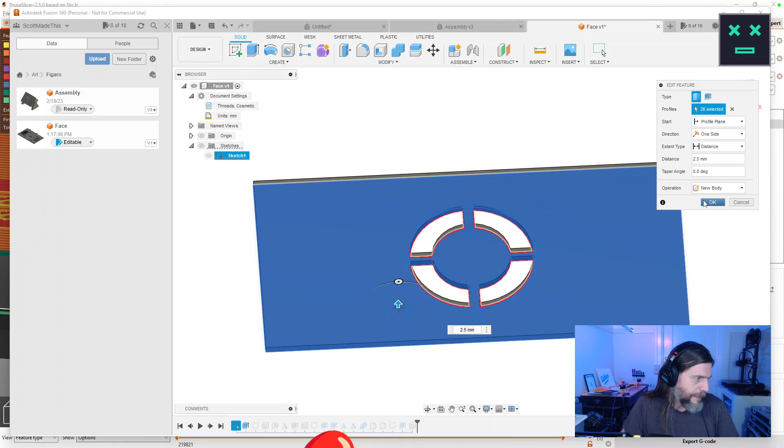Thinner than 2.5 feels very thin. 2.5 frankly feels probably too thin without some sort of little reinforcement thing, which we could do. But I'm feeling like we want to...

Do what? What do we want to do?

I could tell you that the placement of those little screw holes is not very good, but it depends on the stock thickness. I also don't really know anything about the design of that little internal piece. It would actually be sort of cool to try to design the support structure that's going to hold up the little NeoPixel ring. I went through a lot of trouble to incorporate this NeoPixel ring, which is maybe not worth the amount of trouble it's demanding.

I can feel my voice getting deeper. Why is that?

Wait, Terrier, is your puzzle solvable at this point or no? We're almost to the point. This is just so skinny. Kagaz, how's it going?

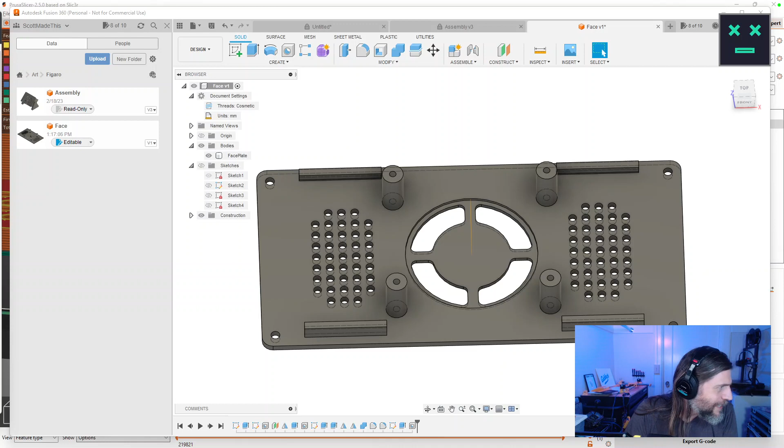Well, I want... I like matte filament, I think matte filament looks nice. And I do like this Overture. Turquoise green, that's not bad. Wait, that's rock PLA, that's not what I want though.

But I don't think Amazon has matte filament, does it? Also, don't like Amazon. Okay, well we'll look at that in a minute.

So Polymaker has matte, look at that. It's got 4 rolls for $30. People like Sunlu, right? All right, I've tried Sunlu. Actually, maybe that filament that I don't like right there is Sunlu. Yeah, but then I have to go through the trouble of tuning it. I kind of would rather just buy. I think Inland is okay. People do like Hatchbox, but it's more expensive.

You know, I feel like I understand this Overture filament because I've printed with it a lot. I feel like I've got good settings for it, so I'm kind of inclined to just go with it. The only thing I don't like is, why is it only matte light teal? I want like a beautiful blue-green. I love the matte yellow, the matte yellow is really good.

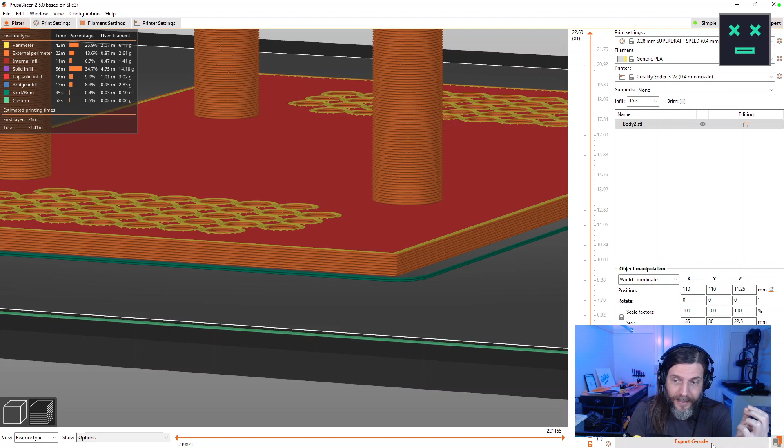Wait, how did I just cut down on time so much? Oh, because that's not the right print. Okay, so let's print this.

Weaves? Like, to make it look like it's woven? Or do you mean actually try to write G code to make it weave? I don't think you ever could, because to weave, you'd have to be able to get under with the filament. If you're really talking about something truly interleaved, I don't think you could do that. I mean, you probably could write custom G code to do something really weird to make that work, but it would not be trivial. You could get a loom instead. There's CNC looms if you want to weave stuff.

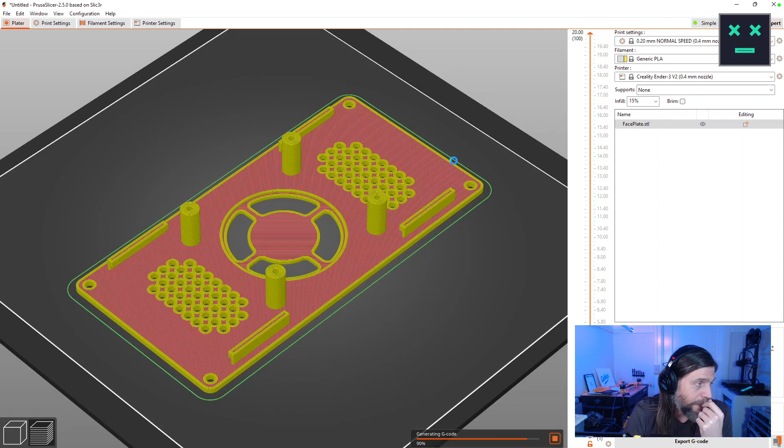Okay, how bad is this? If we print it at super draft, that might be a problem because it may make the tolerances not right. Also a very low infill. I'm just gonna do normal, I think. What I'll probably do... wait, is there non-planar printing? Does that exist?

See, that's why we have the expert here. Oh, you have to have a crazy... I still think it would be very hard to do something fully interleaved, though, right? I get that you could do... but what I'm talking about is printing under, to print a weave. I think you could print something that looks like a weave, certainly. You could probably net something that looks weavy, I feel confident, but to actually weave...

Okay, so 3 hours 52 minutes.

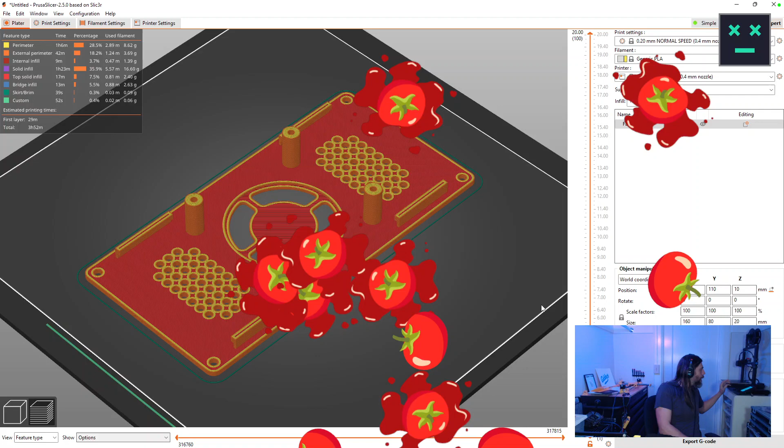Okay, let's print that. Oh, tomato party. Have I tried 3D printing money? Yeah, I don't have the green filament. It would be very obvious. You gotta have the right color filament if you're gonna try to counterfeit money.

Okay, Peritus, thanks for sending the source code. Oh, okay, that is honestly... oh, but that's an old version. I see, so this was still when Socket.io was supported. So that's been a little while - I think I had an update last year at some point. Anyway, cool, cool, I really liked it. I think it turned out really well.

That's the way to do it. I mean, or you can do it whatever the screen width and height are, whatever the resolution happens to be. But yeah, that's the idea - sending the normalized coordinates. That's cool, I like it.